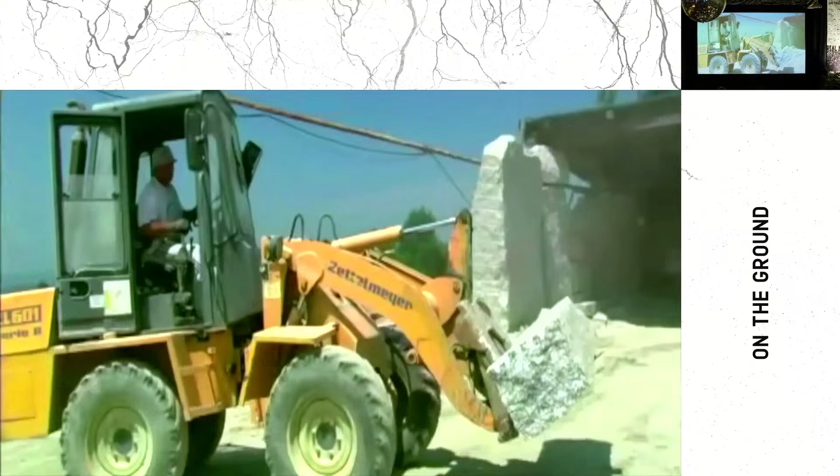So for us, it's always been very important from the beginning to learn about materials, to learn about processes of construction, especially when we started architecture and we had no idea at all on how to build buildings. But we luckily had opportunities working in Spain as local architects. We could access competitions, we could win those competitions and then be able to build the buildings with very low budgets.

So it was very important to learn how to make the best of those budgets. This took us, in our very early projects, where we had to build with stone by code, to the quarries, where we wanted to learn about the origin of materials, and we wanted to learn beyond the catalogs of products that we can all use as architects to prescribe certain products. We wanted to know where this material was coming from. It was an incredible experience that totally influenced what the projects we built in this northern area of Spain, in Galicia, turned out to be.

Beyond the projects, what was really impactful for us was to learn how our decisions as architects are impacting landscapes that sometimes are very remote, landscapes that we do not know, but we should be knowing about.

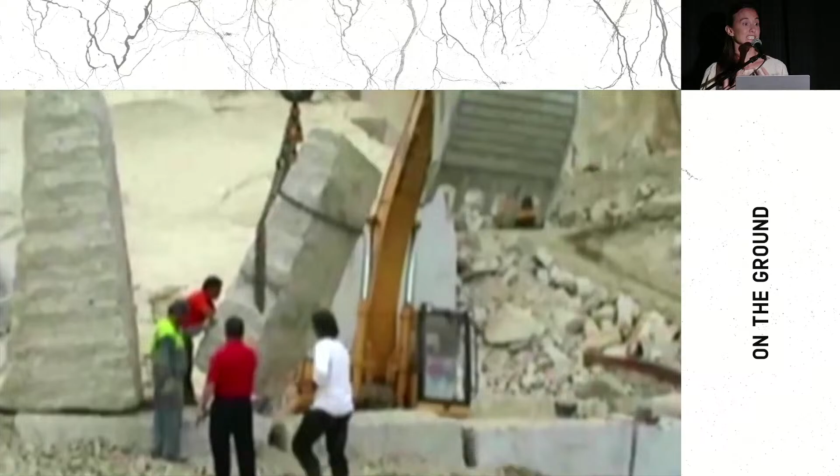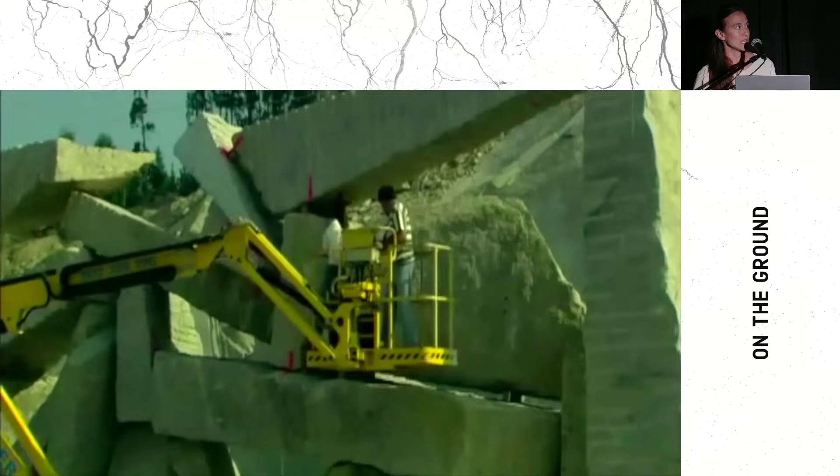This is probably 2006, so almost 20 years ago, 18 years ago. At the time, the discourse on the ecological footprint and the circularity of materials was not so present, but still we had this intuition that it was important to be accountable for the decisions we were making.

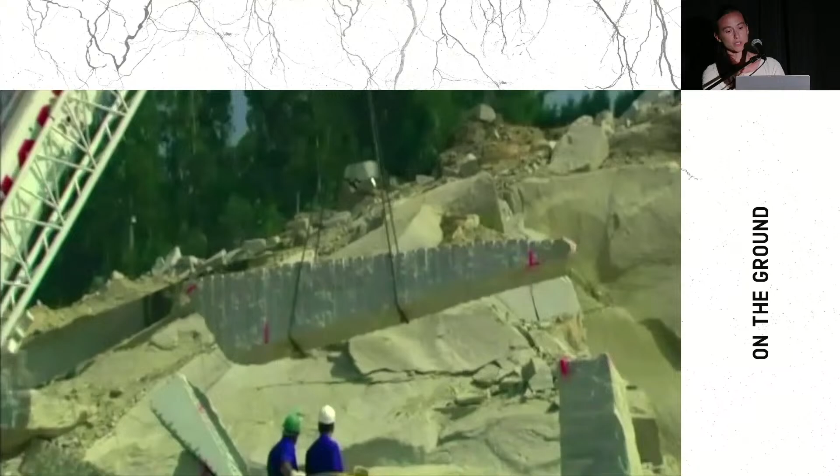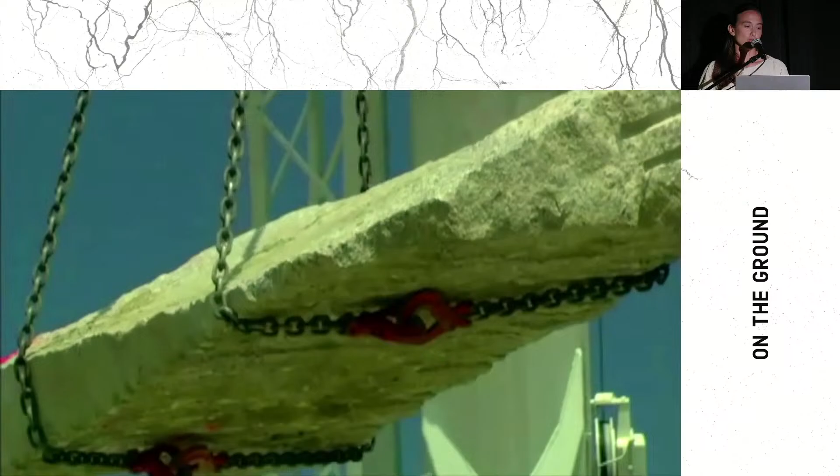So actually visiting the quarry, getting to know the work of the quarry people and the material, inspired one of the projects where we decided to use not the finely cut stones, but really the spare material that is the leftover of the industrial process. The quarry was filled with these very irregular pieces of rock that were meant to be crushed and turned into gravel, but we decided to build a monumental structural wall that would make the main facade of the building.

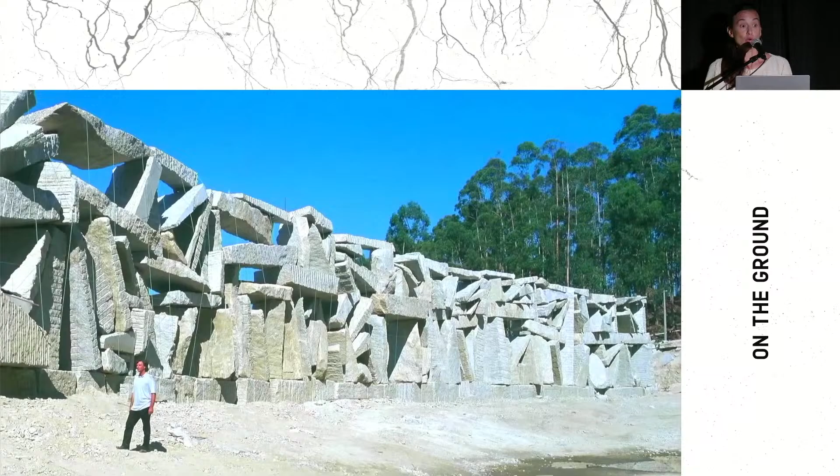The building was a cultural center, a center for authors, for artists, in Santiago de Compostela, in the north of Spain. As I mentioned, we had to build with local stone, and we decided to work hand in hand with the quarry owners to recycle the material and turn it into one big part of the building, and then transport it to the final site.

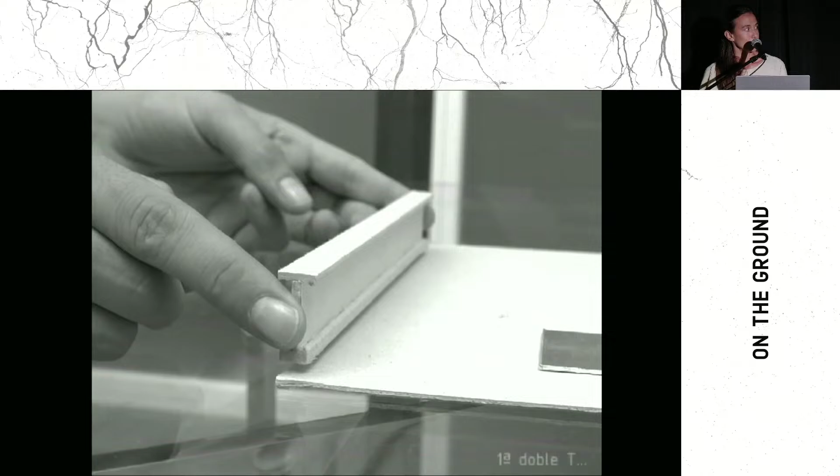Something that at the time we thought made total sense, let's take this material and use it for the building, was really difficult to implement, because what made total sense for us meant changing the rules of how things are built, how things are done. We actually had to become the contractors of the work in order to be able to realize it. It was a very tough decision to make, but really transformed the way we've been operating as architects ever since. So since this work, we changed, or assumed, different hats.

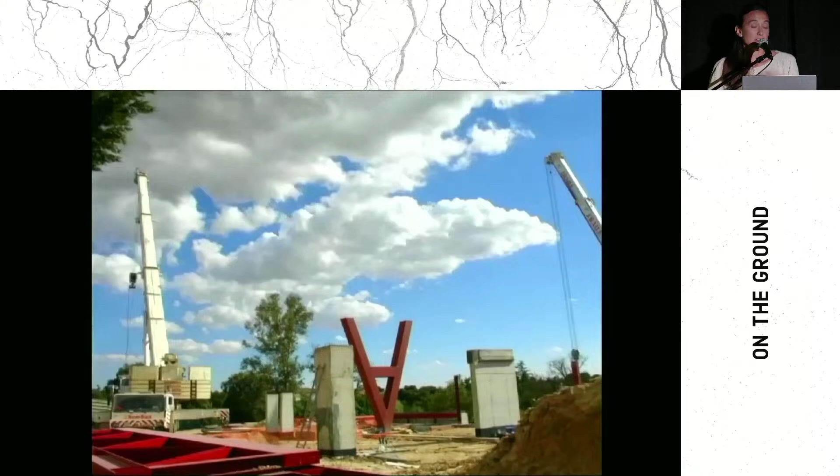This is the Hemeroscopium House, which is the first project where, on top of being the contractors, we become the clients. Again, to be able to develop certain ideas that maybe with a different client would have been more complicated to do.

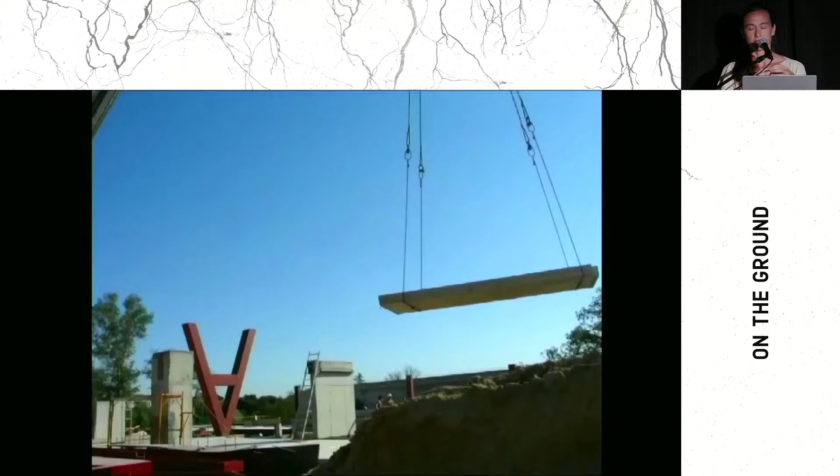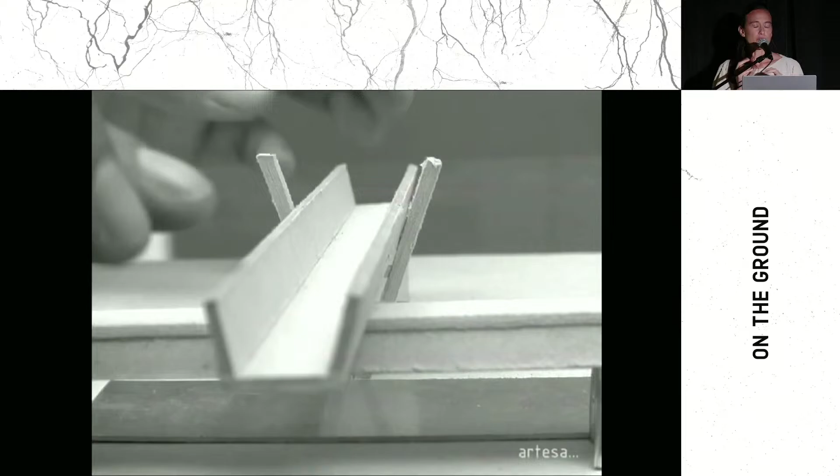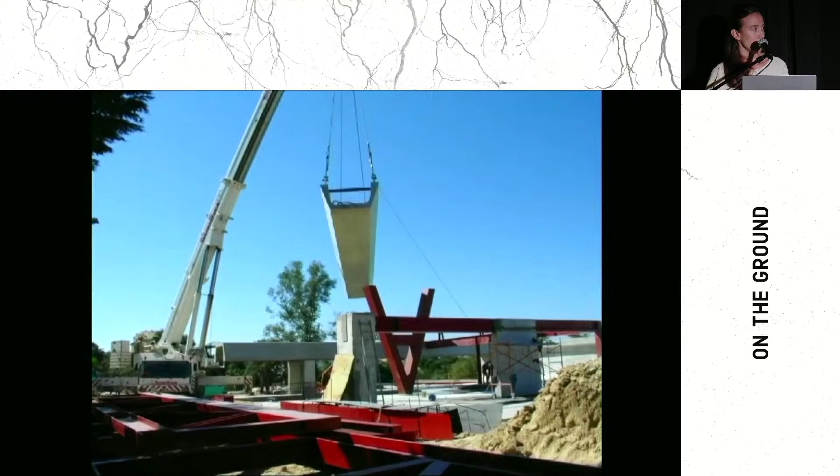This is a project of a house, our house in Madrid. Here again we wanted to recycle, in this case, highway beams, to turn them into the structure of a domestic space. What we were very intrigued about was how can we take standard products, standard parts, to make a non-standard piece of architecture.

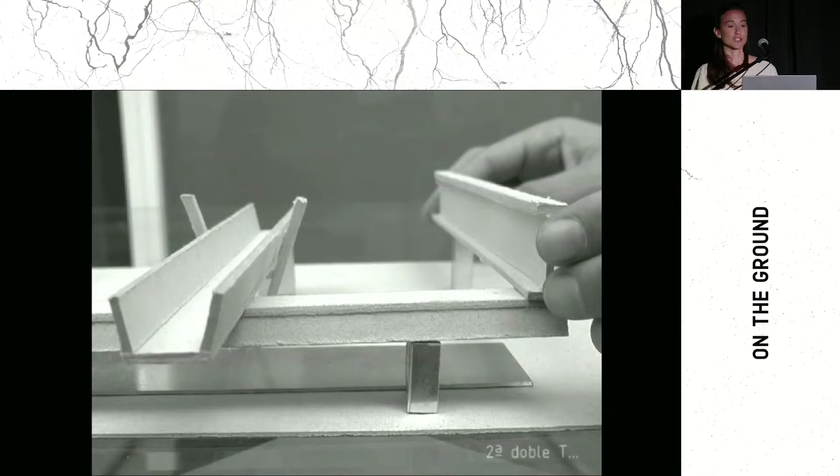At this point, we didn't know how relevant this topic would become in our practice, but ever since we've built this house, we've been transferring this idea and reworking it through a variety of projects.

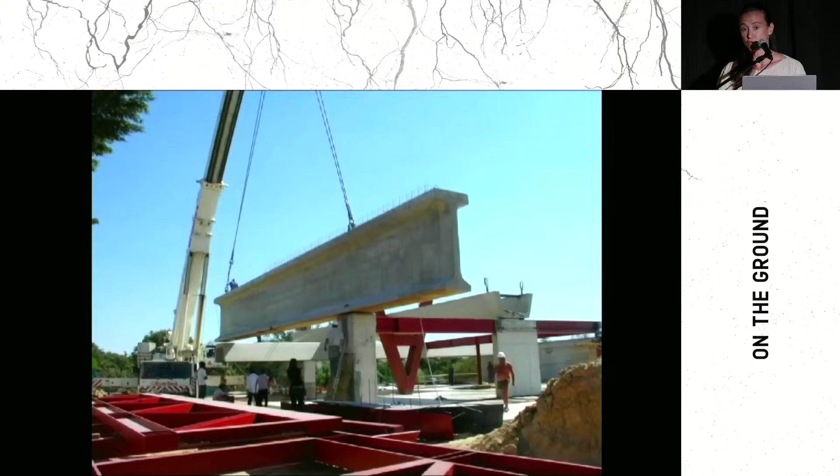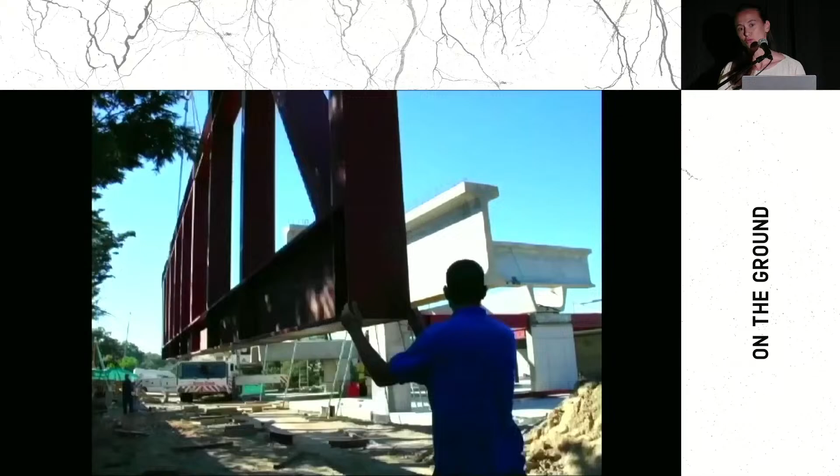So today I don't really want to talk about the specifics of each project, but really these themes, these ideas, that for us are very relevant, that help us contribute through architecture to the discussion on urgent matters like industrialization of architecture. Also, for this project, it has evolved into how to work on affordable housing without sacrificing the quality.

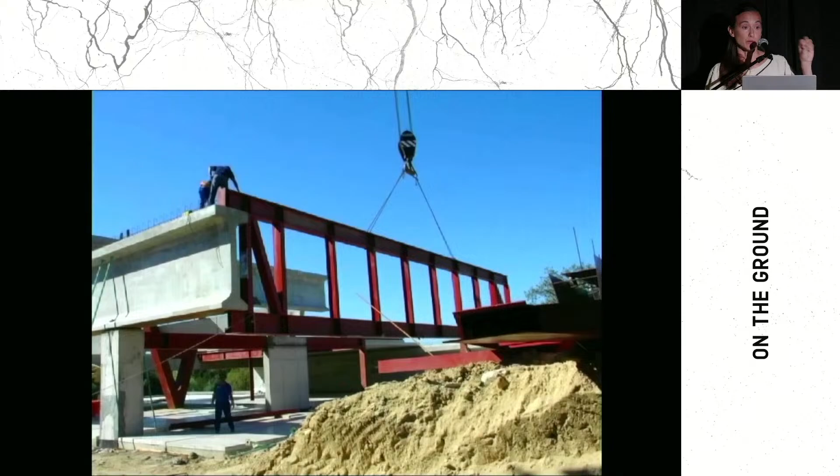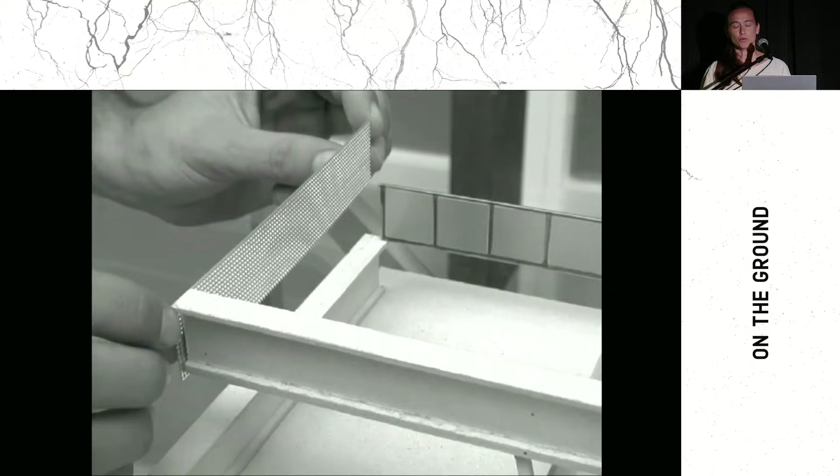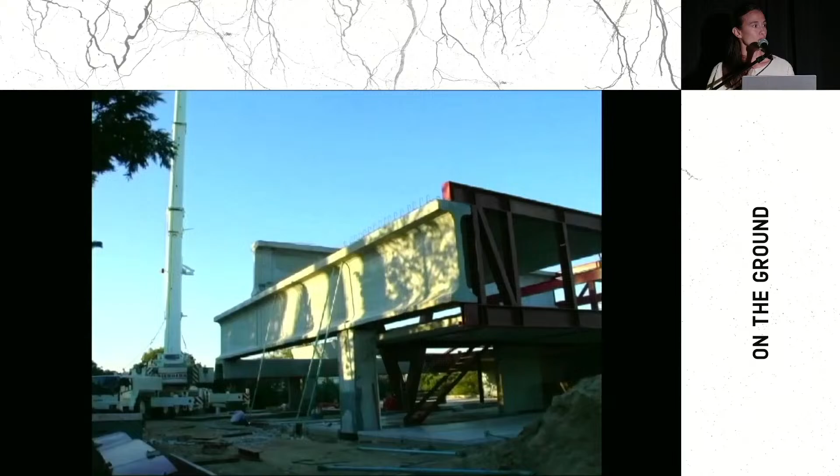So these projects of houses, and I will show a few that we did early on in our practice, have been really relevant to test out ideas, to explore as architects how we want to contribute to our field, and then be able to continue developing these same ideas through other projects for other clients, having, in a way, cleared some of the uncertainties.

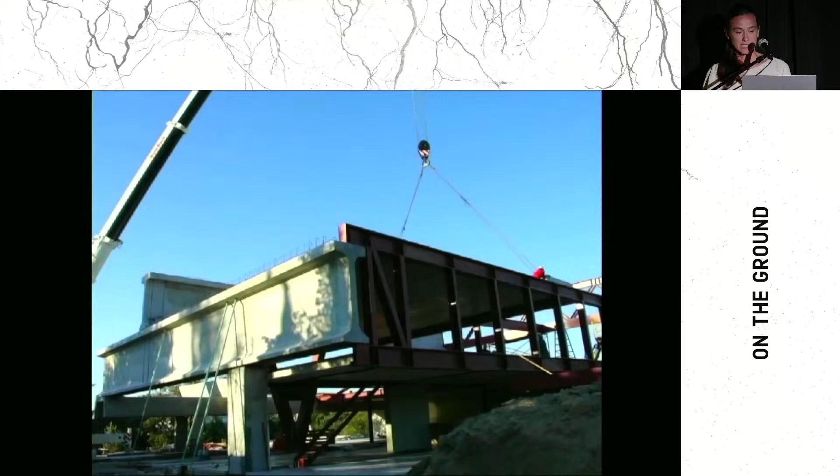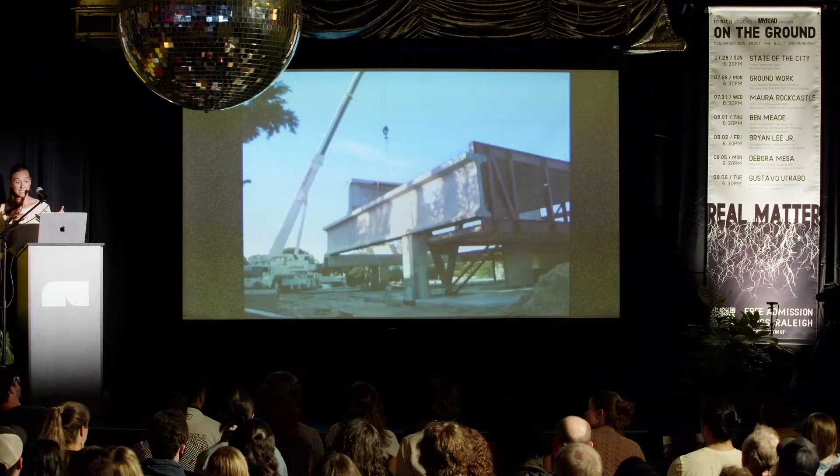In this case, you can see how we are taking very big beams of different sizes. We chose them from a catalog, civil engineering precast concrete parts, and we just give them a different meaning, a different function, to create not just the structure of the house, but really define the spaces. What we are learning with this house is how, for us, designing architecture is not just about designing space and a program, but really developing a structure that is coherent with that idea of space and program, and designing the whole construction process as well.

This is why today I will talk a lot and show a lot about these processes, because for us it's as important what we build as how we are building it, and how the construction methods, the construction orchestration, is really contributing to the idea of the space.

You were seeing there Anton, one of my partners, and this house that we live in and experience, again contributing to this larger idea that we continue to develop on how we can make something unique with parts that are standard.

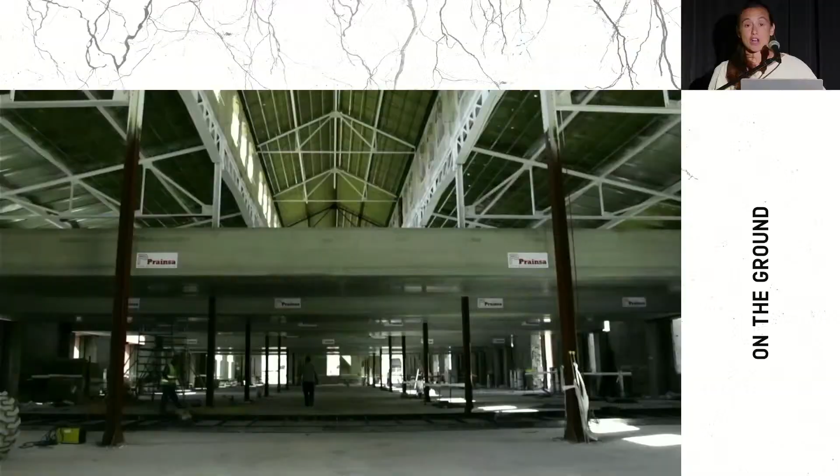What you see here as a kind of very smooth dance took months and months to engineer, to convince the historic commission that this was a very safe maneuver. And in a way, something that we learned is that when you prefabricate, you have to really spend extra time figuring out how things are going to play out on site, because it's much harder to improvise once everything arrives.

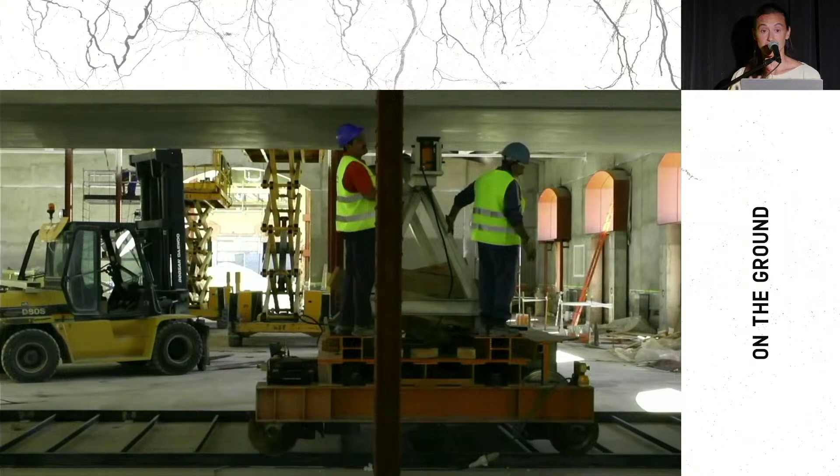The assembly becomes much quicker, and there are a lot of benefits to this approach, but it's much less flexible to changes and to mistakes. But here again, like we were doing in the Hemeroscopium house, we're using this one single element. We are trying to make the construction much more efficient and controlled by making part of the building off-site.

And we're also introducing these very heavy parts that continue with the industrial language of the place in a more contemporary way, but that contribute to actually create a very light, open space, because these bridges, they seem to be floating in the space. So this is, again, an evolution of this investigation, this research that we are doing through different projects on how to introduce industrialized parts and construction methods.

Now I'll show a different house in the landscape. Again, kind of a house as an experiment, as a laboratory. In this case, a very different site condition. The idea here was we wanted to test how we can build in the landscape and how we can build an architecture that will belong to the landscape once it's built, almost.

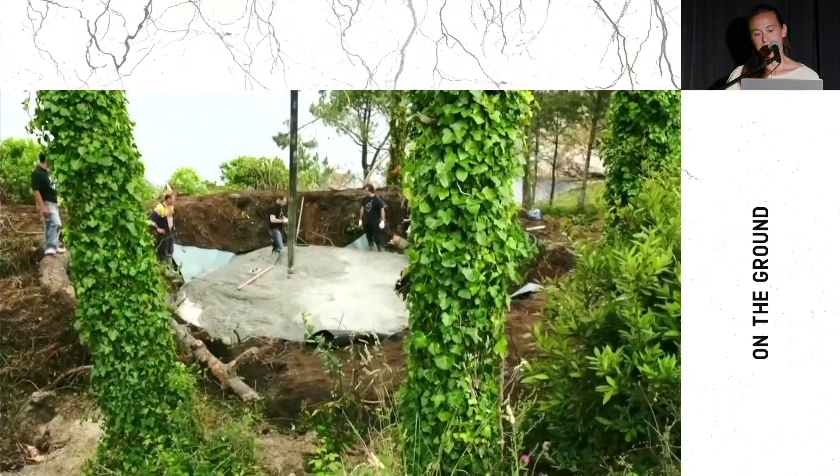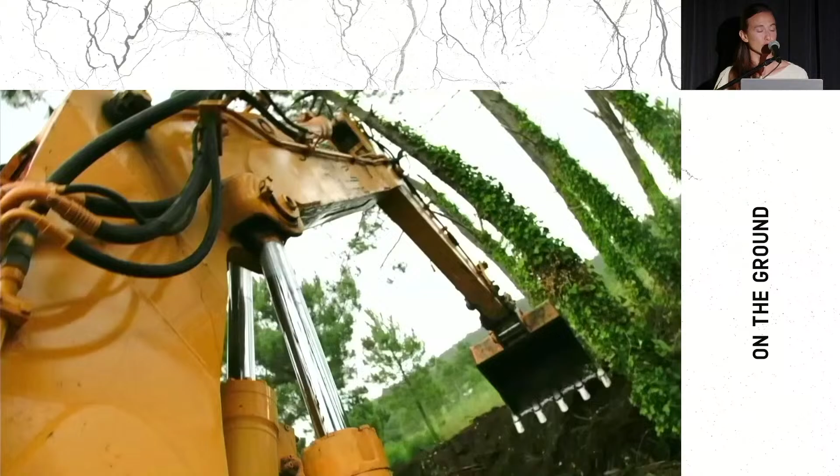So we wanted to see if we could create this kind of artificial landscape as architecture, and the way to do it was really to use as much as possible all the materials around, very few means. We were carving the ground, using it as mold. We were using the hay bales of our neighbor. We were using concrete from the local concrete plant to consolidate earth and rocks and vegetation and create the structure in between the soil and the hay bales. And with the hay bales, we were building the internal space that then we would remove to discover it.

The project here, very differently to the Hemeroscopium house or the project I showed before of the Reader's House, where everything needs to be absolutely controlled, this is about relinquishing control. This is about almost defining a project like a recipe and then implementing it on site as a performance that would never be the same if we did it a second time.

So here we were very interested in exploring this architecture in connection with the landscape, as much as this process of design and construction, where as architects we were not forced to make every single decision, and where we were not even in control fully of the outcome.

Actually, this was one of the most exciting but frightening moments of the project, where we, when we removed the hay bales and the soil, we discovered the architecture that we had built. We didn't know if it would be a complete disaster or if it would be a place we would be able to inhabit. And once more, like the Hemeroscopium house I was showing before, this project has planted the seed of our research that we continue to do today.

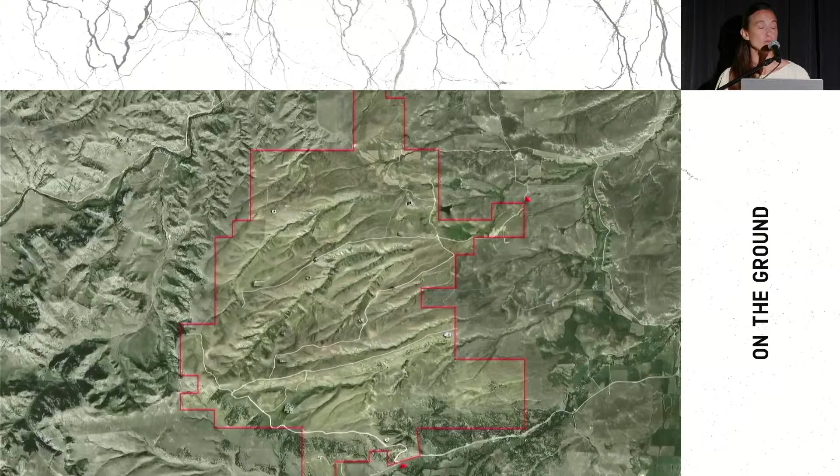These would be open rooms where visitors would need to take the time to go from one place to another. We designed almost like a series of them that responded to different situations on the site.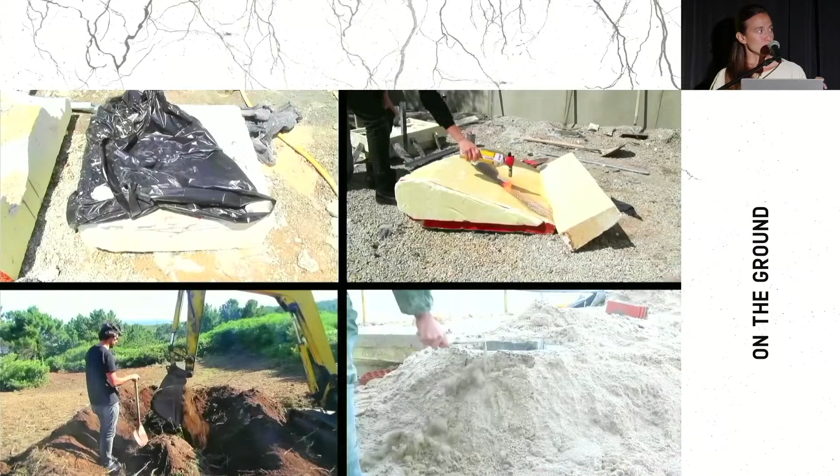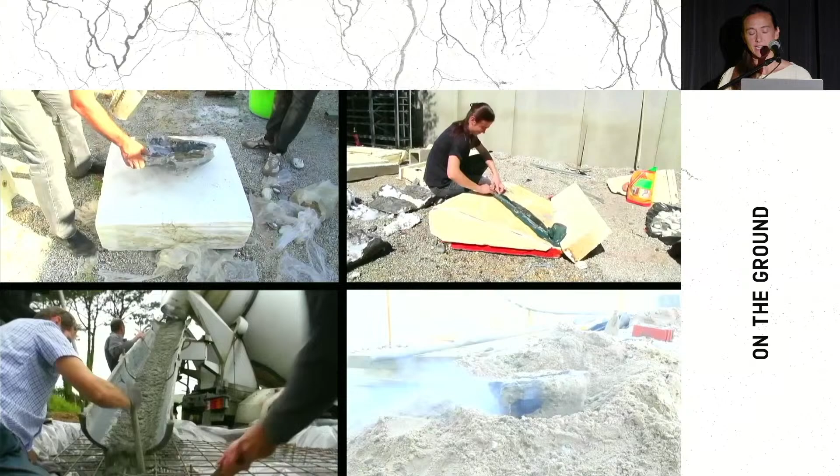The processes of construction also had to do with treating the land, using the land as support, as a structure, looking at how land is formed, geological processes of erosion, of sedimentation, or on the lower right end, even designing projects through explosions, and combining energies and matter to create these places in the land.

Again, in different moments, some were bridges, others were water fountains, or just places on top of the hills to gather, cantilevered viewpoints. In this case, there was a larger theater, because the program was to make these rooms also places where different artworks could be displayed, and also where music performances could happen.

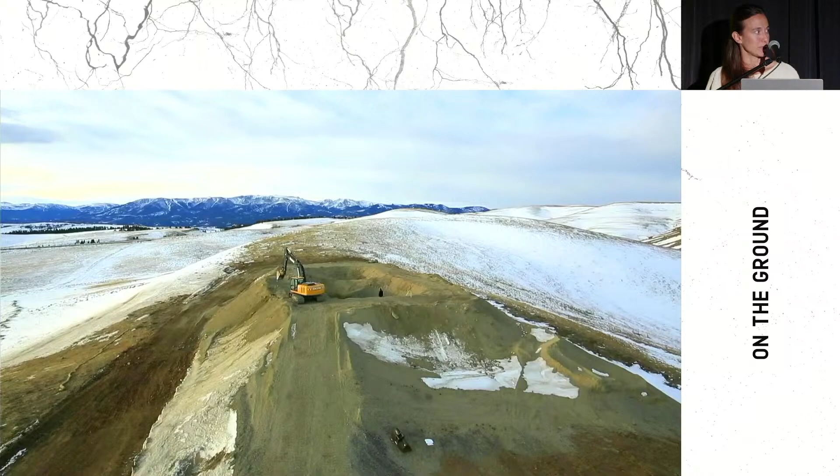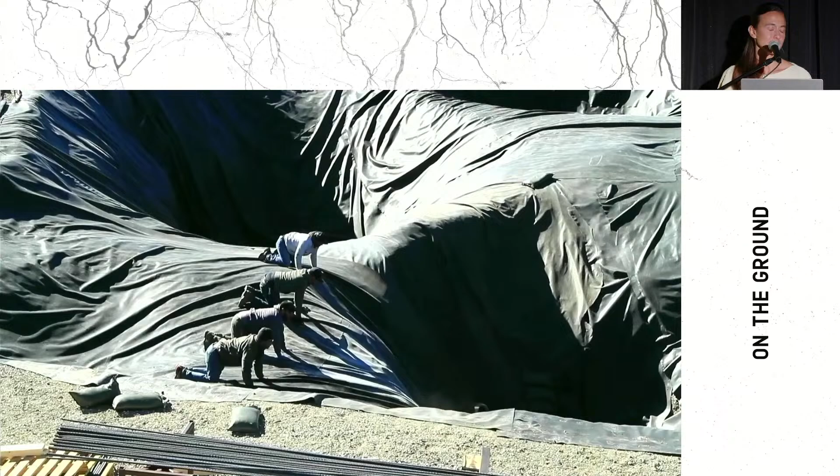The client ended up choosing three of them that we built on the site, and then they collaborated with different artists that completed the master plan.

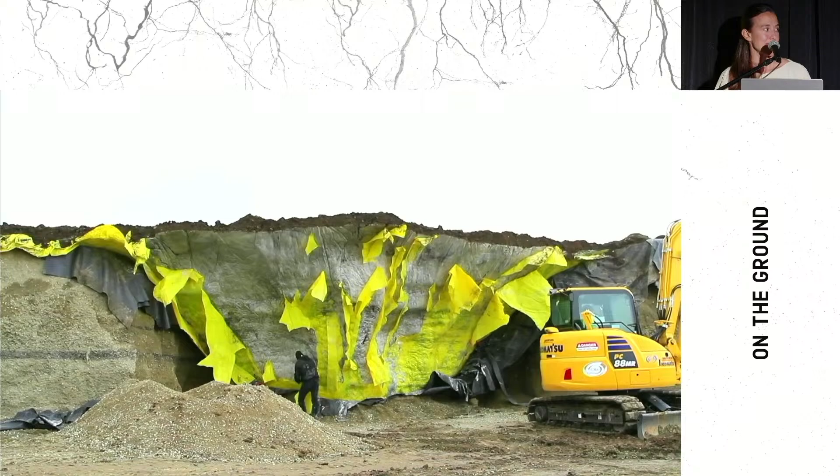So you can see here some similarities to how we built the truffle, how we used the land and the ground as much as possible in our favor to cast these big rooms as big rocks that are able to withstand the very extreme weather in this place on Earth that has extreme sun, extreme snowstorms.

And so these structures offer shelter if you're walking and hiking in the area, but they also offer a place to have performances. They help to navigate the land. I will let you hear a bit of a performance under Domo, which is the bigger structure that we built, that works as an acoustic shell.

So the way it is shaped, the textures of the wrinkled concrete, they help to move the sound in different ways depending on how it opens into the landscape.

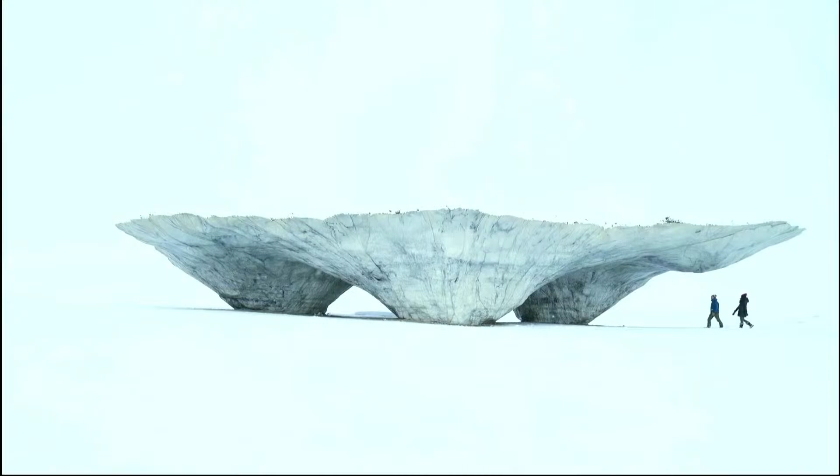At some point, these rocks could have existed, arrived here, like the Rocky Mountains. But they have the properties of architecture. They shelter you from the rain and the snow. You definitely feel a change of temperature when it's very hot outside. These big thermal masses protect you. And they also make the sound travel in ways that make them very fitting as kind of performance stages.

So, is this architecture? Is it not? I leave it up for discussion. But for us, when we are building in this type of landscape of remote spaces, it's really learning from the land and maybe finding other forms, other ways of building architecture. It's something that we are very curious to continue exploring.

Now, also a very different house, this one in Brookline, in Boston. About 12, 13 years ago, when we were doing this project in Montana, we moved to the US to be closer to the project and also to start a laboratory in MIT.

And we wanted to continue this exploration on prefabrication, but knowing the limitations that weight has when you're trying to move things around, we started to look at very light materials like foam, building structures that would be very easy to move. Some structures, like this one we call the cubic igloo, are big volumes, almost emulating these big rocks that we had previously worked with.

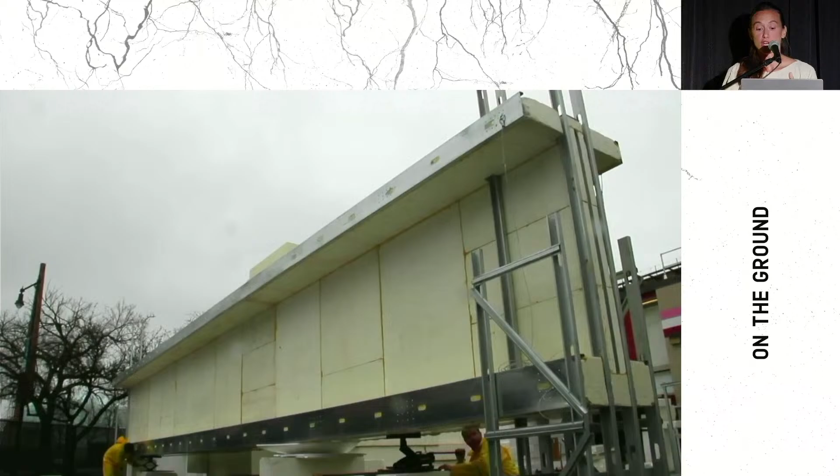It wouldn't be legal to build because foam is not a very good material in terms of fire performance. But structurally, it actually performed really surprisingly well.

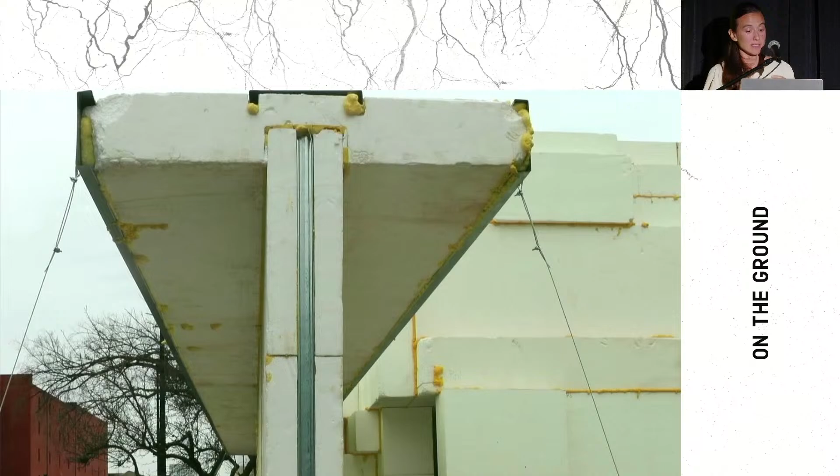As we were doing this research, we were immediately thinking how to apply it. We like to research, but we like to research and test. We don't like to stay in the lab too long.

And so we needed a house in Brookline. We had and have a big family, four kids, and we needed to be in a place with good public schools. So we found the ugliest, cheapest property in a neighborhood with very good public schools, and we decided to buy it, already thinking about how this could be transformed.

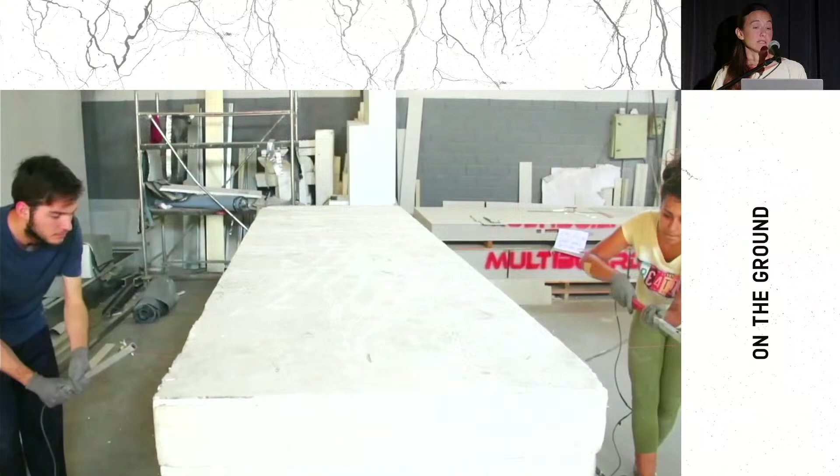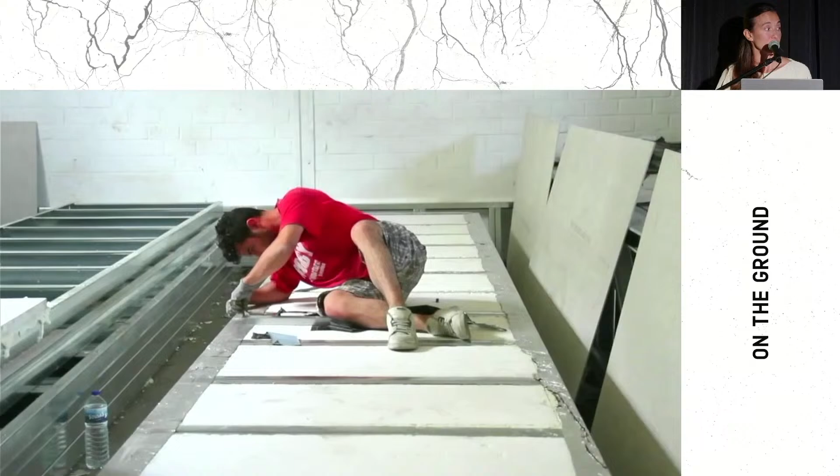So we took this garage, renovated it very quickly to turn it into a house where we could all fit, and then started to permit and design the project of building on top of this warehouse an extension for the house. This extension had to be very light so that we could use the existing building as the foundation without the need to spend additional money on it.

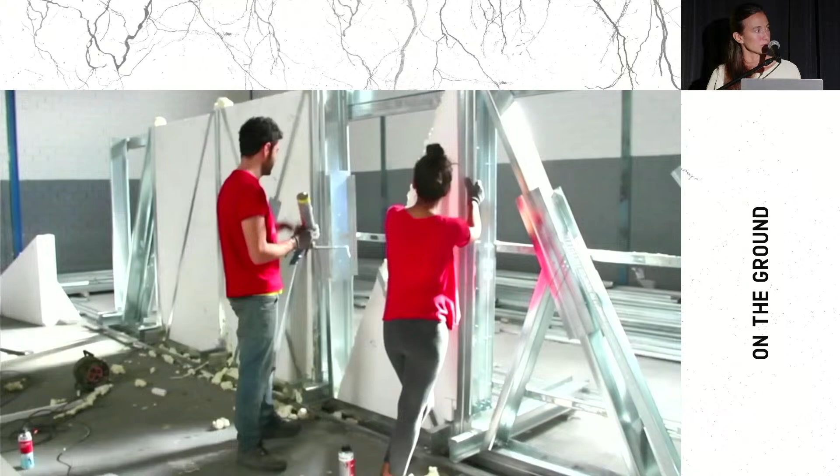Very soon it became clear we couldn't use a local contractor because it was super expensive to build and we couldn't afford it. We also wanted to apply some of the research, so we decided to build it in Madrid, where we had our team and could rent this kind of warehouse very cheaply. And we prefabricated the house in big parts.

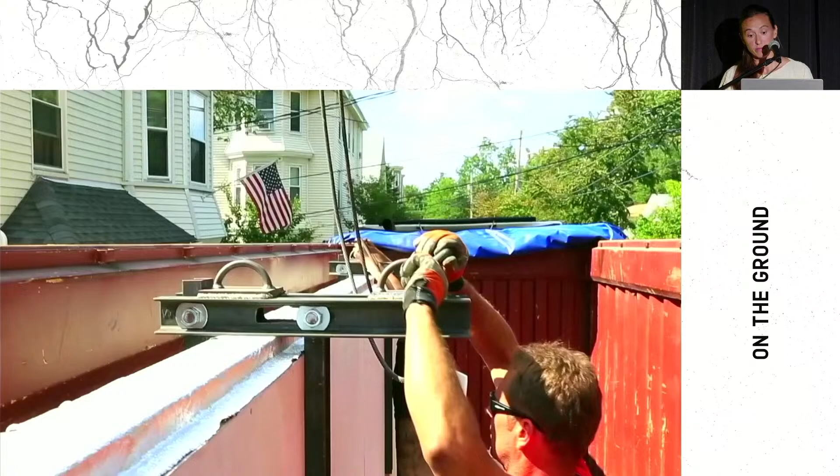The bigger they could fit the container, that would also fit the footprint of the existing building in Brookline. We were trying to optimize the volume of the container to minimize the number of containers, but in a way the container was a dimension we needed to deal with.

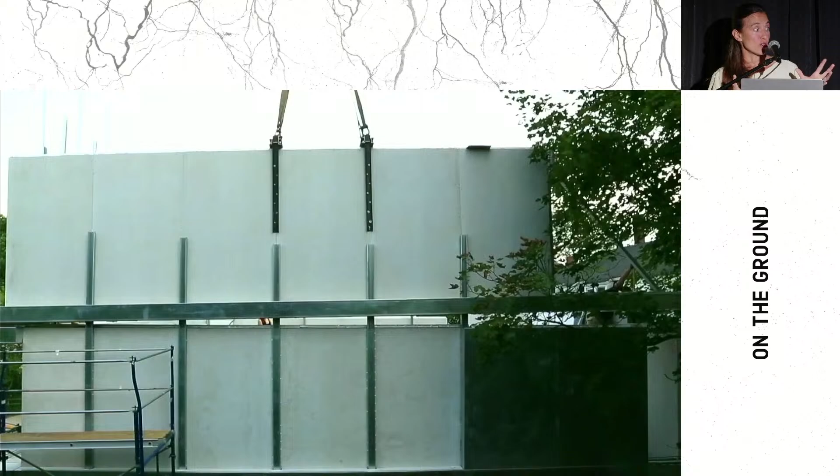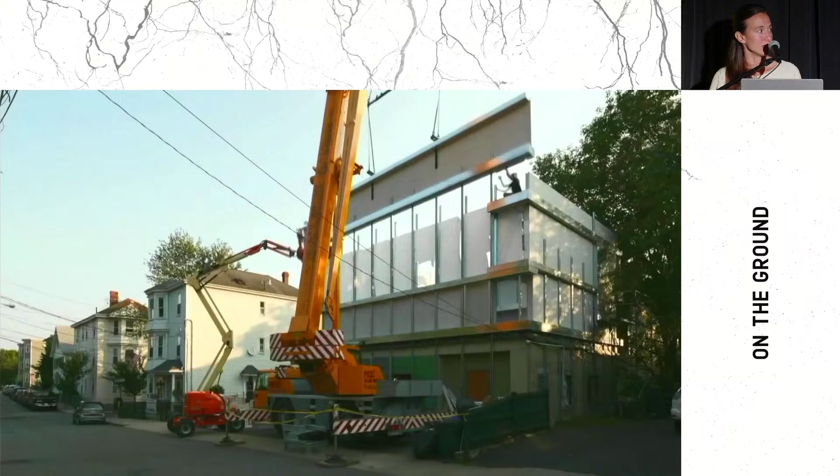So we brought the house in parts. Here again, the timing, the control of the whole process was really critical. We had no place to store these parts, so we had to time the containers so that as they were arriving, we were craning, we were placing. The construction was super quick, super efficient, but very stressful in the sense that it really had to work. Once on site, it would have been very difficult to make changes, but much more expensive.

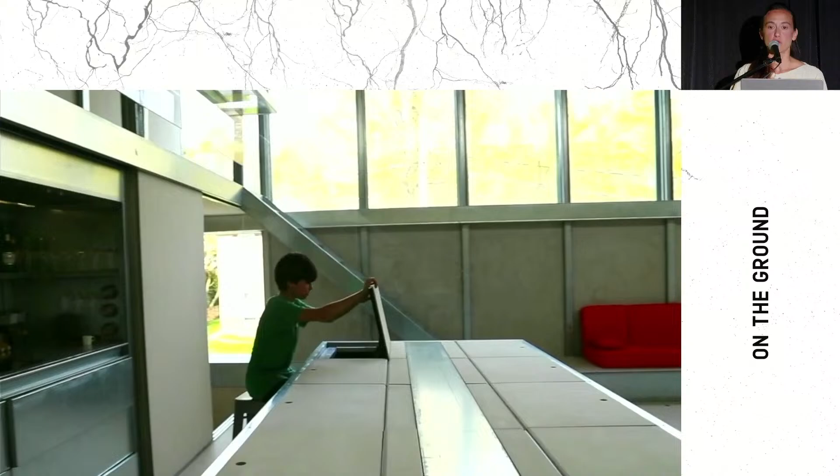So here we are, again testing some things that we have tested before, but also some new ones. We are inheriting the 4x8 module that governs a lot of the construction here in the States. We are also learning from light construction, but adapting some of the technology. And we continue to build on this idea of how we can prefabricate a home in an affordable way, but that doesn't compromise the quality and the ambition of the space, of the architecture.

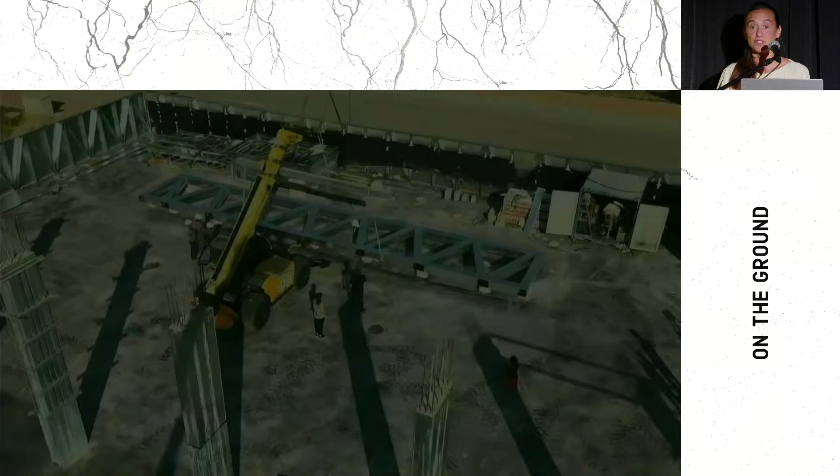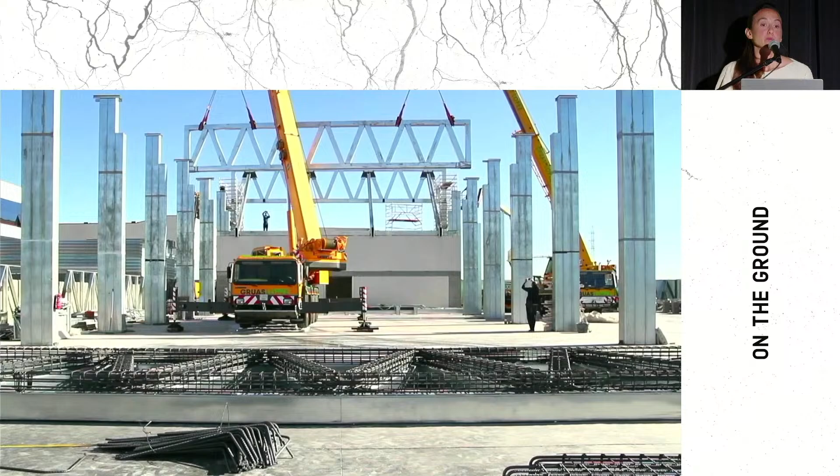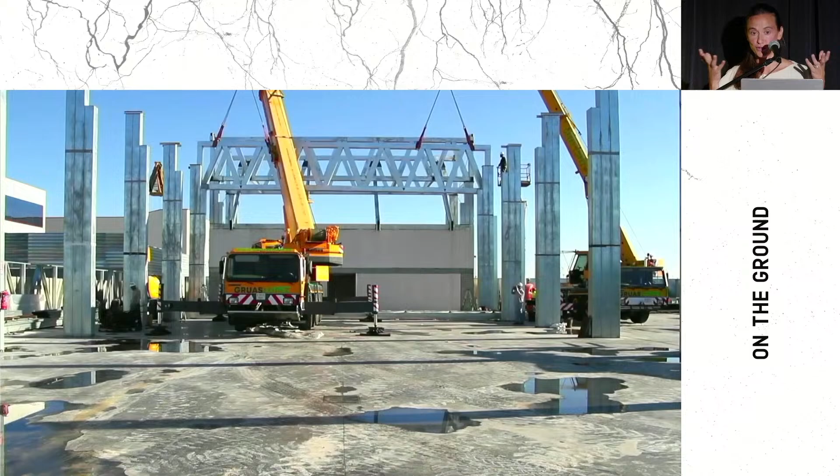So this is our own story, coming to the US as a kind of middle-income family, struggling to build a house at an affordable price. We could do it because we have other resources, because we know how to build. We don't need to pay an architect, a fabricator. We just had to hire a contractor for the rigging. But we know the struggles that a lot of families have, and how it becomes increasingly difficult in cities like Boston. I heard that Raleigh is also, prices are going up.

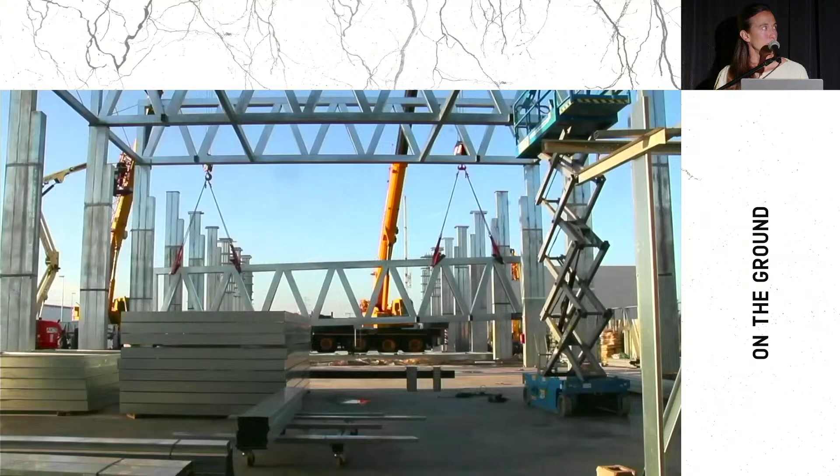So this investigation on the home, on our own homes, has really built an interest in thinking how we can contribute to the larger conversation and needs about housing and affordable housing, and housing with good quality.

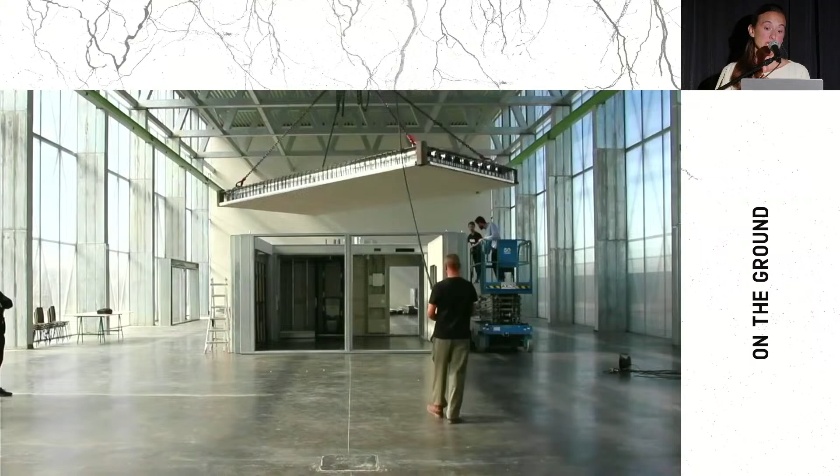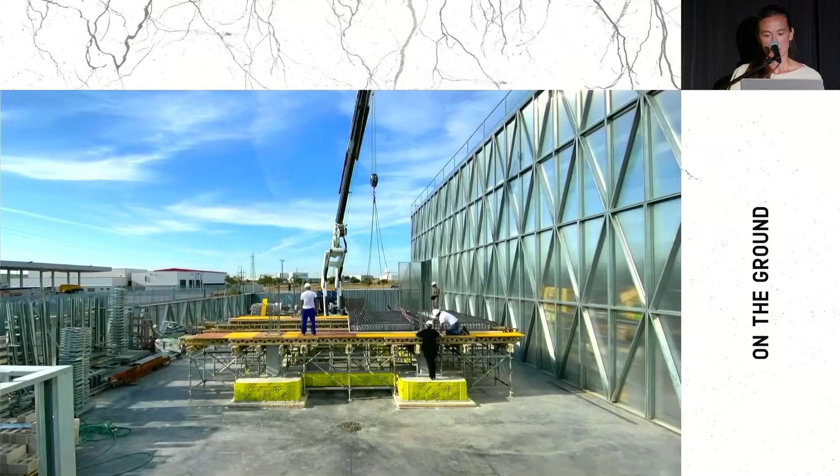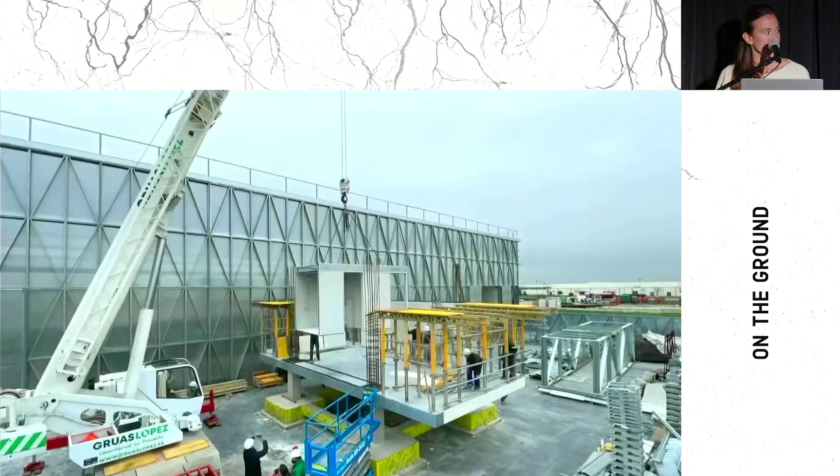The next step, as we were becoming contractors but also fabricators, was to build our own factory space in Madrid, and we built it after building the house in Brookline, again testing some prefabrication systems. We have ever since continued to work on developing a system for industrialized housing that can be applied at a larger scale, where we think about the house in components that can be assembled quickly, that can be prefabricated, that can be shipped long distances, and that, as we were doing in the origins with the Hemeroscopium house, think about standard parts that can build non-standard buildings.

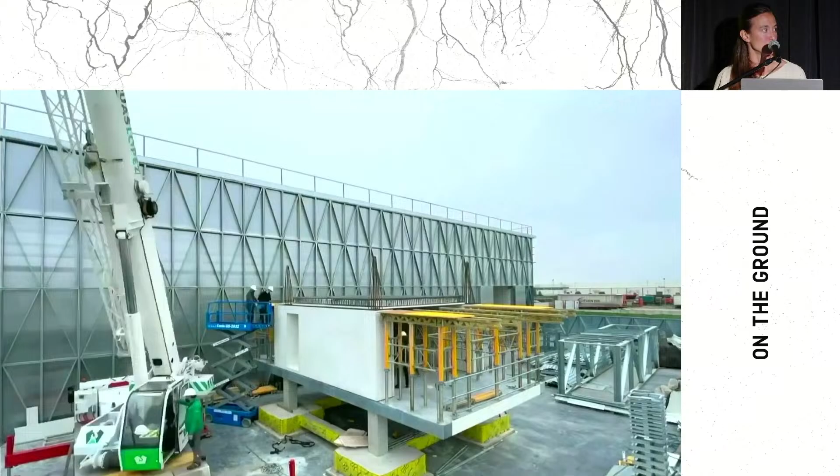I think this is the big challenge of industrialization today, and why is it so relevant that architects contribute to the discussion versus leaving this task just to other professionals that maybe lack the sensibility or the creativity.

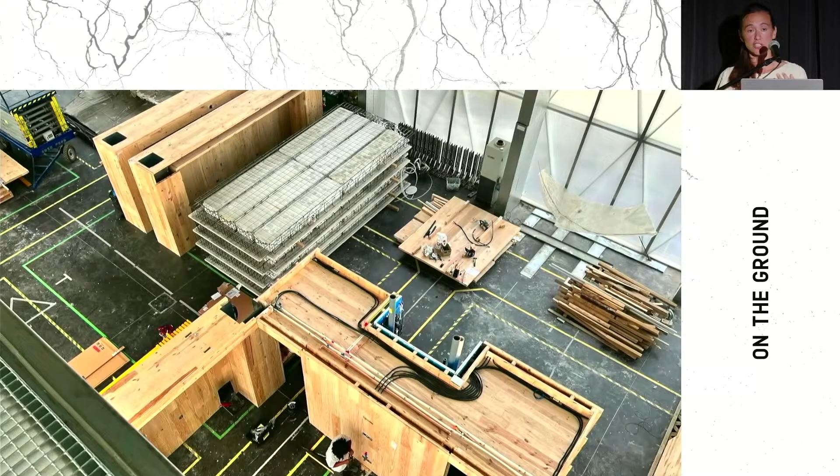Of course, this is an effort that brings together engineers, architects, manufacturers of very different kinds. We've been iterating the materials, the systems, from concrete, steel, CLT, to try to minimize the ecological footprint. And we've created a startup called WOHO, World Homes, that has this huge ambition.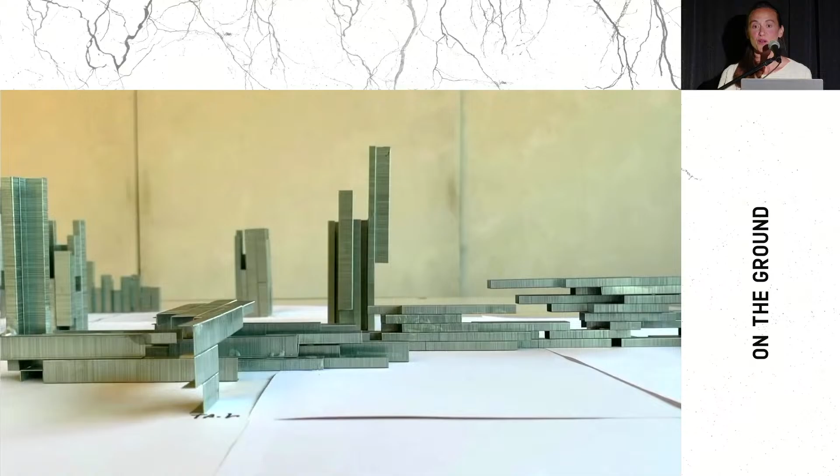Of course, the first question that a developer will ask is like, how many multifamily buildings have you built? No, and this is where we hit the wall, but we are there. We think we can contribute to making this possible. We are now building our first super small 5-unit building in a low-income neighborhood in Madrid, and hopefully that will serve as the proof of concept to maybe bring developers in and help us build another building. So yeah, a very complicated but relevant topic that we are dealing with.

Now, showing one of our latest projects, a project that we are building in South Korea at the moment. This one in a very beautiful landscape. It's the visitor center for a museum of gardens close to Seoul.

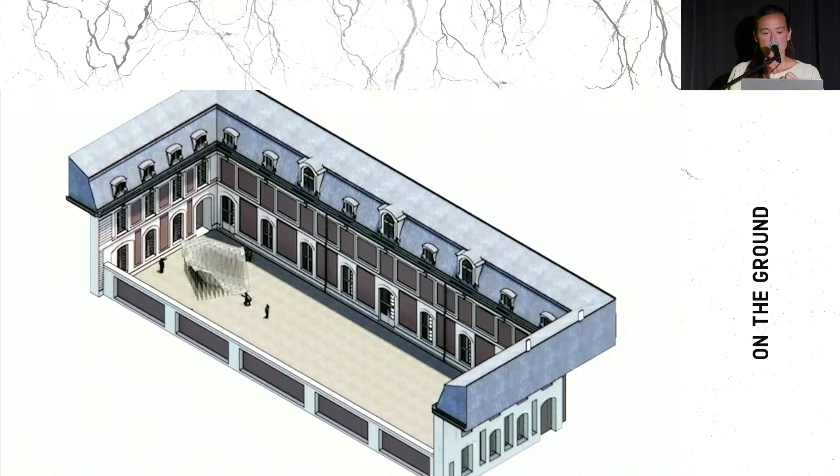Here the idea is, as this is a building where people are going to go through in order to enter paradise, that as they go through the building, they forget the city and they are already entering the landscape. You can see a lot of the ideas that were sparked with the Truffle, with the project in Montana, that we are developing here. We are now at the point of talking with the contractors, seeing how they can build it, and of course dealing with all the issues and all the problems.

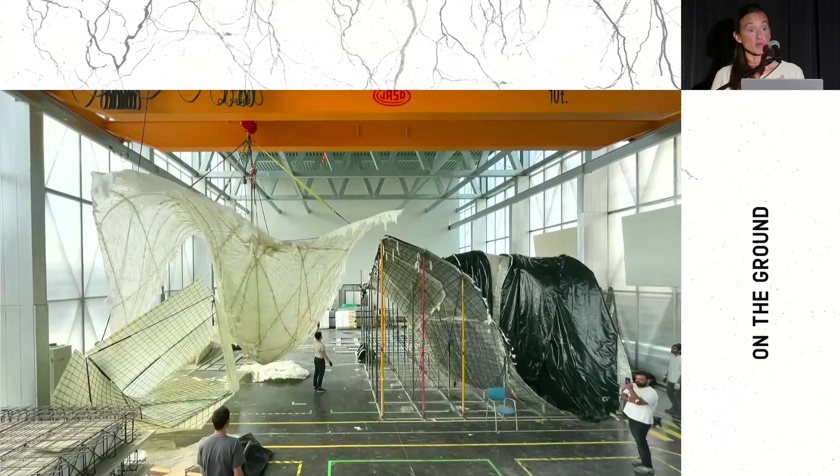So at the time that we are developing the project, we are building some prototypes. In this case, this is a prototype of formwork, a very lightweight formwork to cast this structure, that we can manufacture ourselves in our lab, that we can transport. In this case, we are transporting it temporarily to an exhibition, but this was to show the client how we could transport it to Seoul, assemble it, and then have the structure cast.

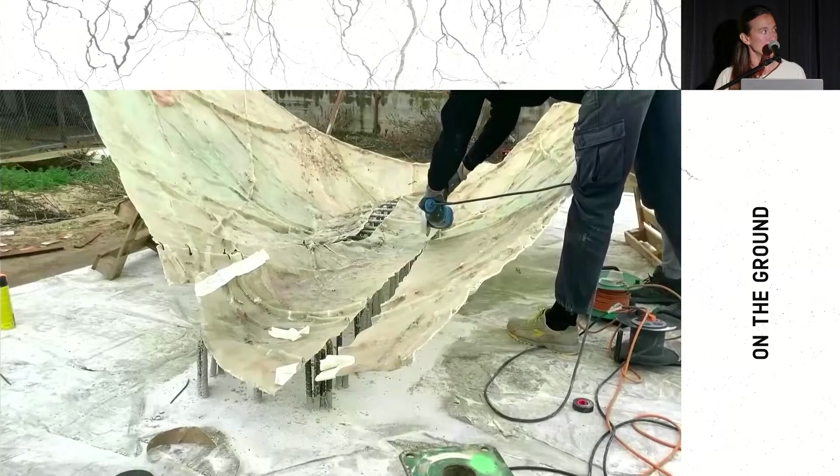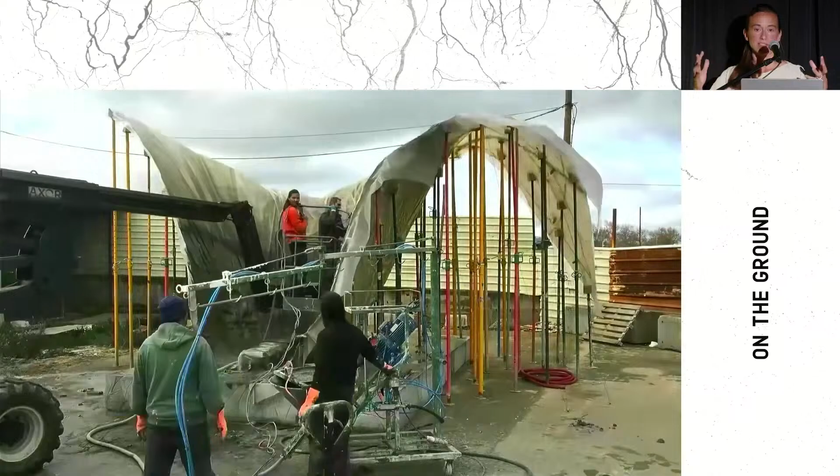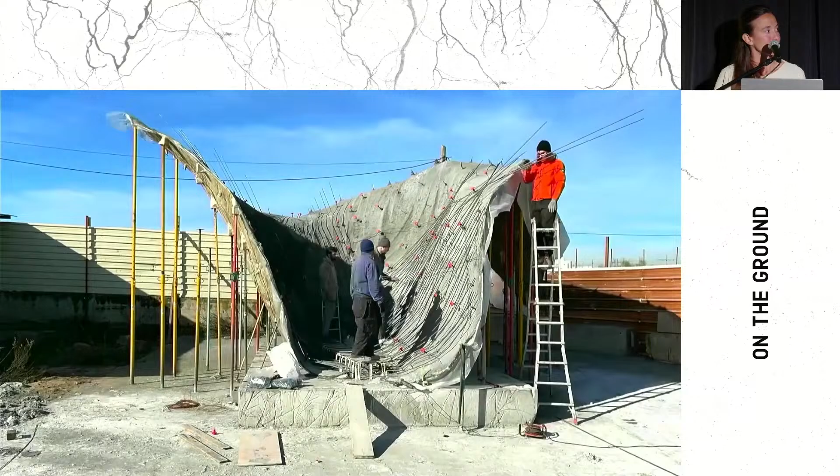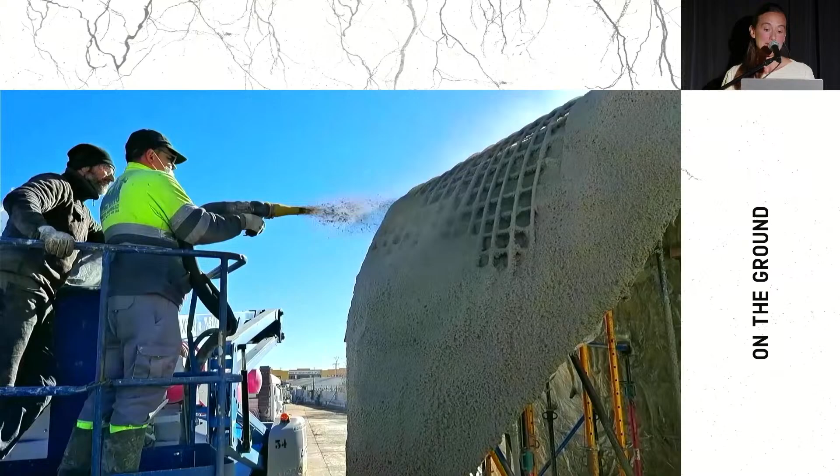We're not sure if they're going to go with this idea, honestly, but we did the full job of spraying all the structure on top of the mold, doing all the reinforcement. This is a tiny pixel of the full building, but very representative to show the contractor all the different steps to build the structure, and also to avoid the typical comments of 'this cannot be done,' which are very reasonable, by the way.

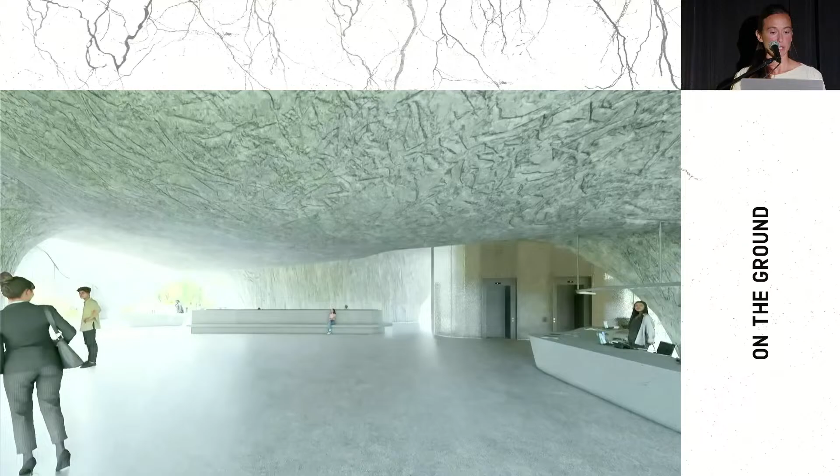So here you can see how that translates into the building that has this ground level very open in connection with the landscape, but differently to the project of structures of landscape. Here it's more of a finished building with its facades and its systems. You can imagine the conversation of where to place the detectors and the sprinklers in this structure right now.

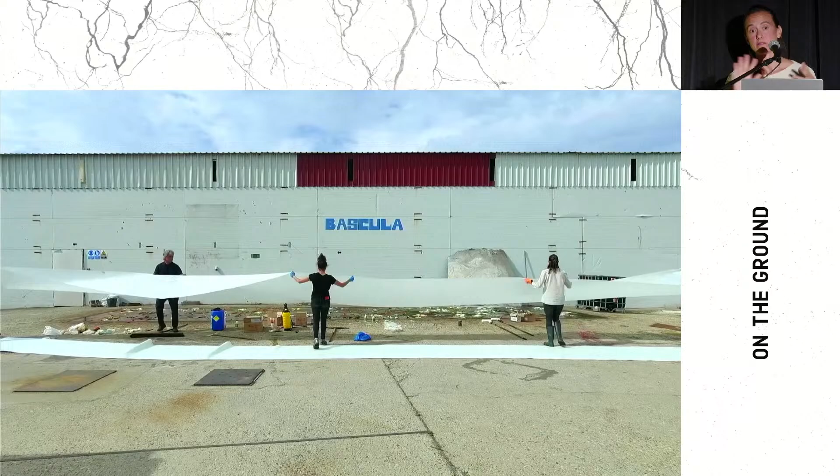And then it has a basement where we create this light wall that, again, we are prototyping in our lab, where we are creating a resin wall, almost like something hybrid between an art piece and a partition wall, that will be retroilluminated, that will represent different types of gardens in a more abstract way, and that we can fabricate, we can roll, and we can ship to Korea.

And again, this is something that we're now in the beginning of its development. We're very interested in these kind of composite materials, their translucent quality, how they can have this hybrid nature between being an artwork and a piece of architecture or a piece of landscape. And we are using this project to test it.

And so now we are, again, in the process of finalizing some of these prototypes, but the excavation of the site is happening, and so hopefully it will be built sometime soon.

So the last project I want to show you kind of brings together many of the ideas I was presenting to you through the lecture. We also go back to the origin. This is a project we're doing in a quarry. In this case, it's an abandoned quarry on the island of Menorca that was exploited for some time.

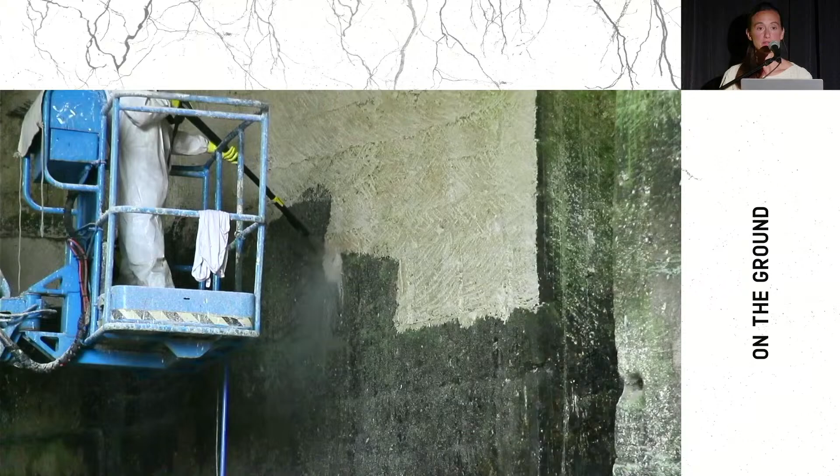So in a way, we found a place that we would have liked to design ourselves, but that was there. And we felt that our role was to discover it and use it as a case study for how to repurpose some of these industrial spaces that surround us, that once they fulfill their economic mission, they are left abandoned but have great value if they can be reimagined.

So the way to transform it was really to clean it, to introduce light and air in the darkest corners using the techniques that built this space in the first place, and adding very few other elements. Really, it's about understanding how we can work with this big thermal mass, how we can move around light and air, how we can domesticate the space slightly, but not too much that it can lose the character that it has.

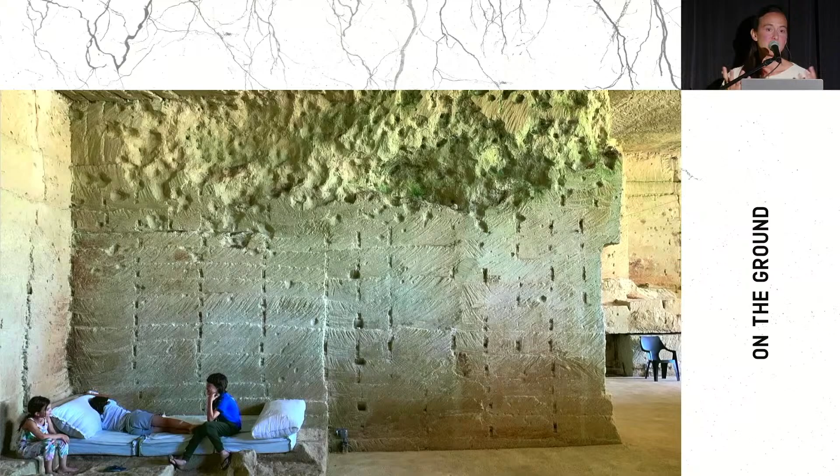And it is, again, for us, a laboratory on the very basic elements of architecture. One of the first lessons we received was how, when we cleaned the stone, the light was bouncing in an incredible way, and the light levels were coming up without the need to even introduce any additional light.

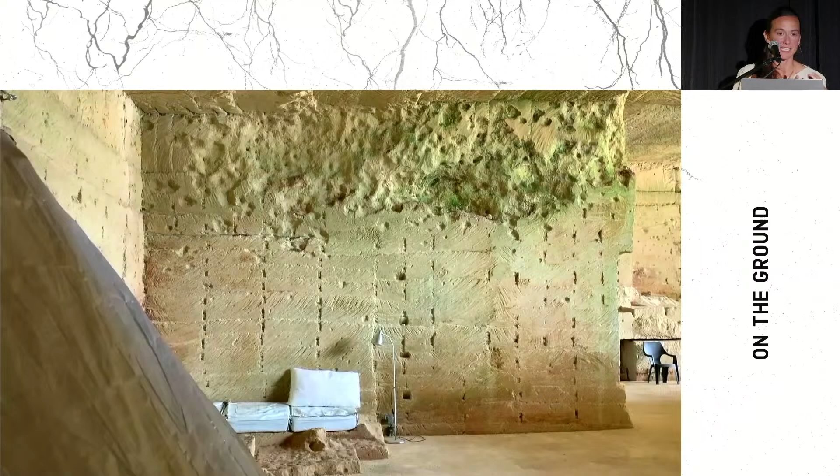And then we're reading the architecture, finding which places make sense for cooking, for sleeping, for working, and also moving around in different times of the year, because in the winter you want to be closer to the light, to the facade. In the summer you want to hide in the deeper parts of the quarry.

So it is a place where we try to spend time, that we modify very little by little. We've introduced these very light facades that will protect it from getting additional dust inside, and that we use as a way to understand a different way to be in the environment, where we don't need maybe to achieve the levels of extreme comfort that sometimes it's even uncomfortable, that we force into our buildings, and seeing how we can understand the environment better, maybe use less energy.

In this case, it's fully autonomous, powered with solar light, how we can use what is around, what is available, and also put ourselves in the situation of living like that.

This project for us says a lot about how we like to operate as architects, how we think we can contribute. We believe that architects have this potential to see things, to imagine environments, futures that enhance what we already have. It just requires, I think, sometimes getting out of our comfort zone to test things out, find the allies to make that work. We don't need to access huge projects from the start to make big statements and to make an impact. Thank you very much.